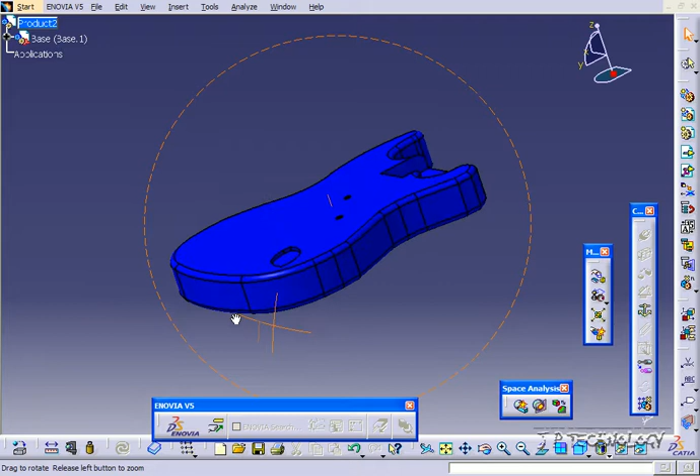So to start off, let's bring in a few parts. Click Insert, click Existing Component, click Product 2, and let's insert the base. Click Open, and we've brought the base in. Now we're going to be using this as our base, so we're always going to be selecting the other part first and this part second.

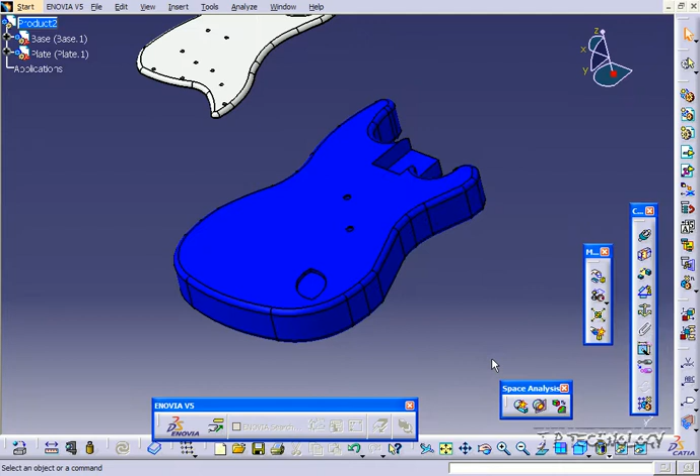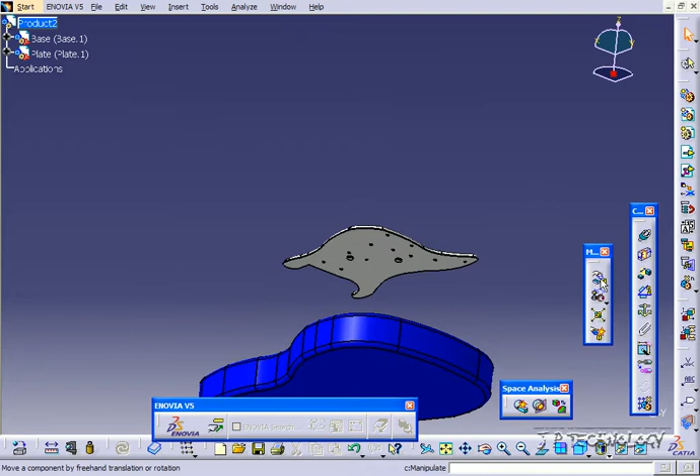Now let's bring in the plate, so click Insert, click Existing Component with Positioning, click Product 2, click the plate, click Open, and just move it around a bit. Click OK. We're going to line up one of these circles and position it over here. Let's click the snap feature and snap this axis to this axis here, and it's the right positioning, right way. We'll do the snap again and position it on this face. So now we've snapped the plate onto the base.

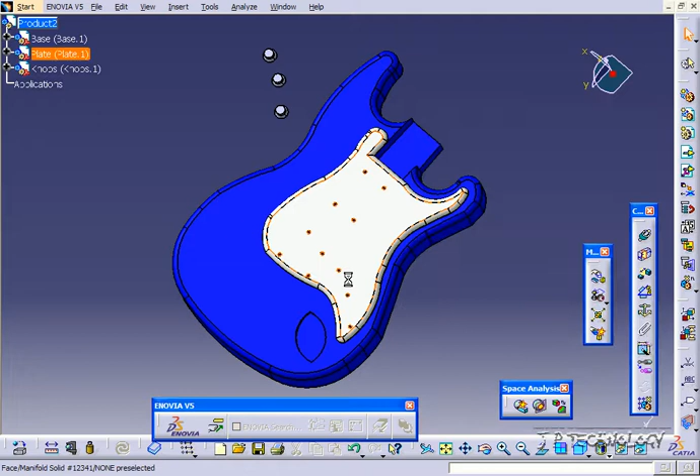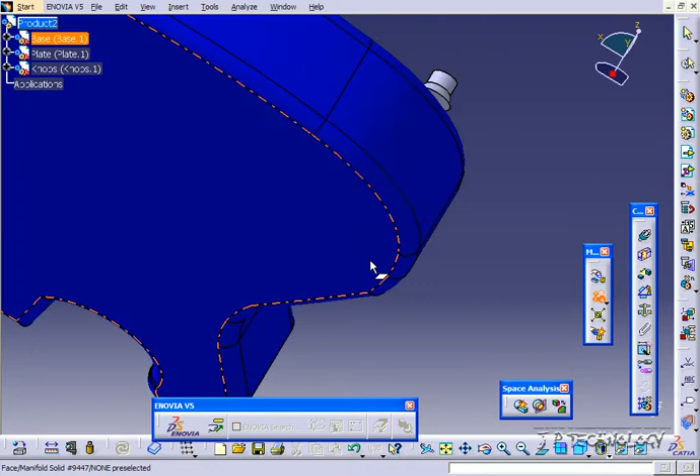Let's bring in a couple more components, click Insert, Existing Component with Positioning, Product 2, and this time let's click the knobs. Bring them in and just move them around so you can see where they are. Click OK, and let's position the knobs on these three holes here. Like the other ones, these knobs are already created as one part, so all I need to do is line up one of them, and they're all going to be lined up correctly. Now we'll snap the faces, this face here onto this face here, and now we've positioned our knobs.

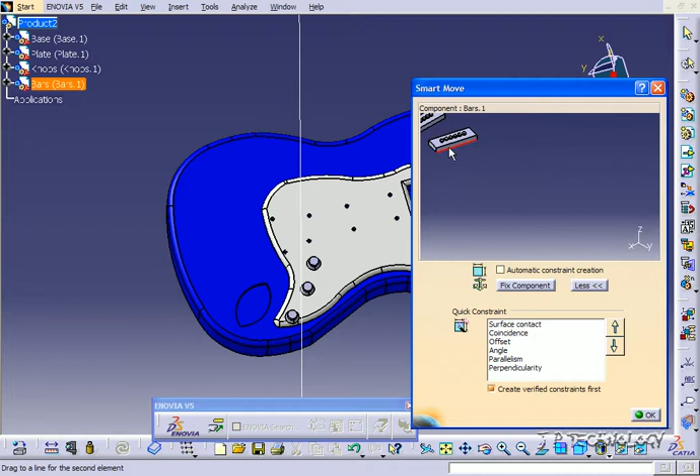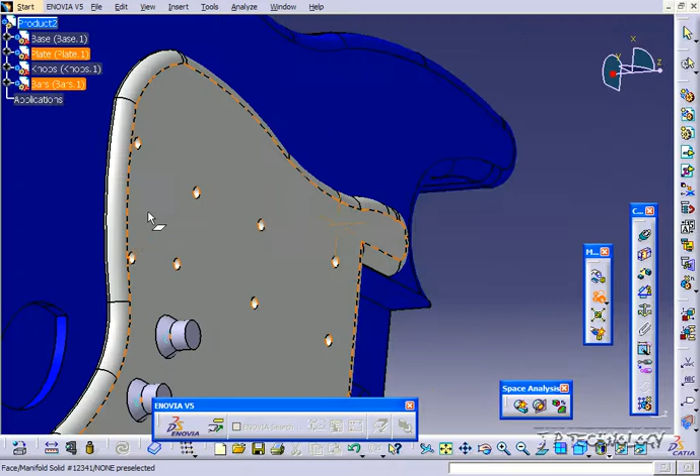Now let's bring in some more parts. Click Insert, Existing Component with Positioning, click Product, and we'll bring in the bars. Click Open, and just move them around so you can see them. Click OK. Now we'll click the manipulation, so snap these bars. I'm going to click this one there. Or wait, let me go back, we didn't select the axis. So select the axis there, and we'll select the axis here. Click OK, click outside, and now let's snap the faces together. Click this face, and click this face, and now we've snapped the bars on.

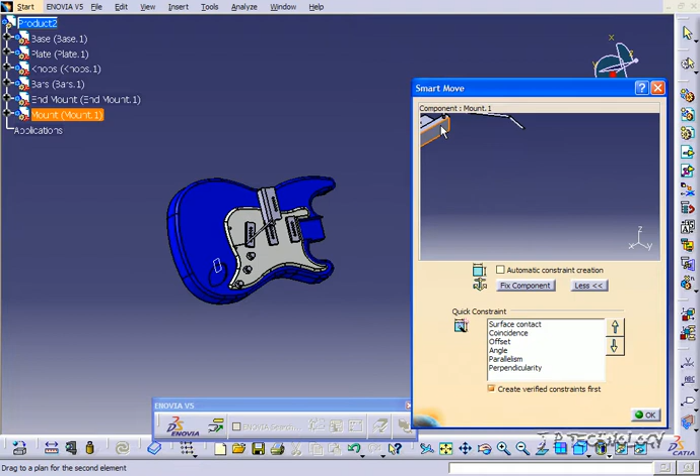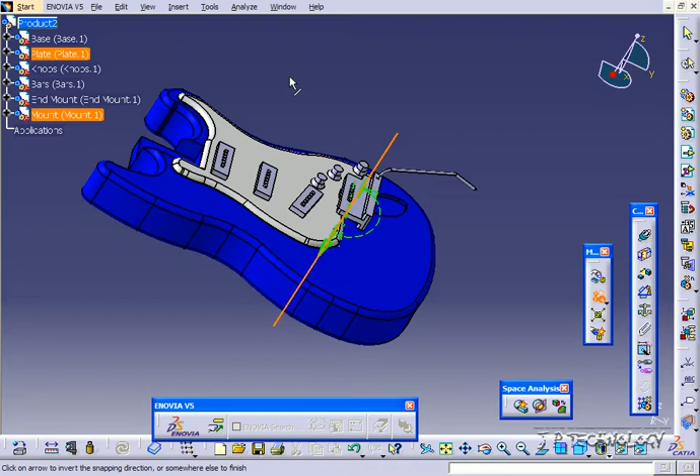So now let's insert another part. Click Insert, Existing Component with Positioning, click Product, and let's click the end mount, click Open, click OK. We don't actually need that one right now, we need the other mount. So click Insert, Existing Component, click Product 2, click the mount, click Open, and just move this around. Now with the end mount, just leave it there for now, and we'll position everything after. Click the snap, and let's choose the axis here, and we'll choose this axis here. Click outside, and now snap the faces. Click that face there, and that face there, and now we've snapped that down.

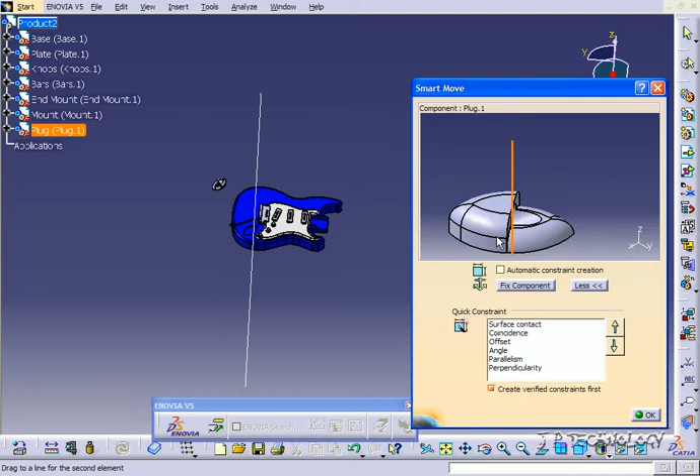So now we'll insert another component there. Click Insert, click Existing Component, click Product 2, and in this one, let's insert the plug. Click Open, and just move it around so you can see where it is. Click OK, and let's snap this. We'll click Snap, and click this face here, and click this face here, and now they're in line.

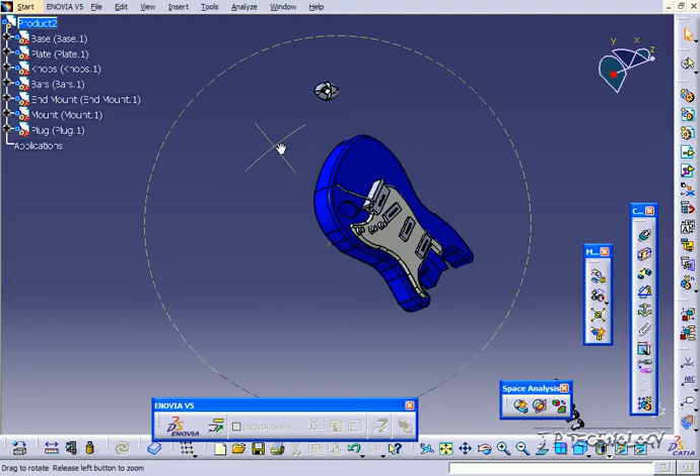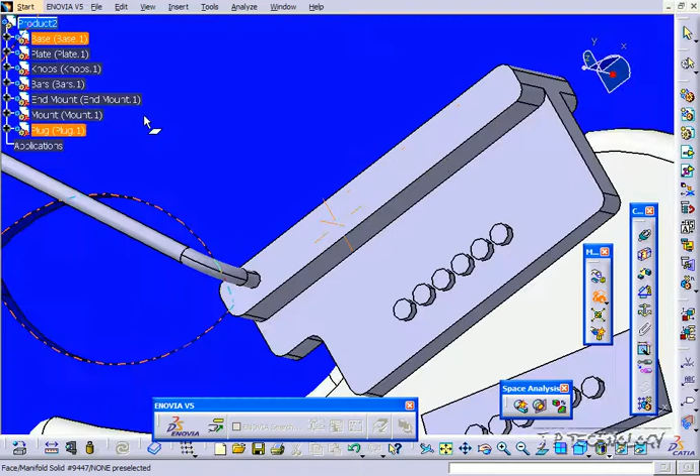So now we're going to snap a point. Click the snap, and we're going to choose that point right there, and we're going to snap it into here. Click that point there, click outside, and now we've snapped that component in.

Now we're going to bring in the neck, so let's insert it. Click insert, click existing component with positioning, click product 2, and let's bring in the neck, click open, and just move it around a little bit, click OK.

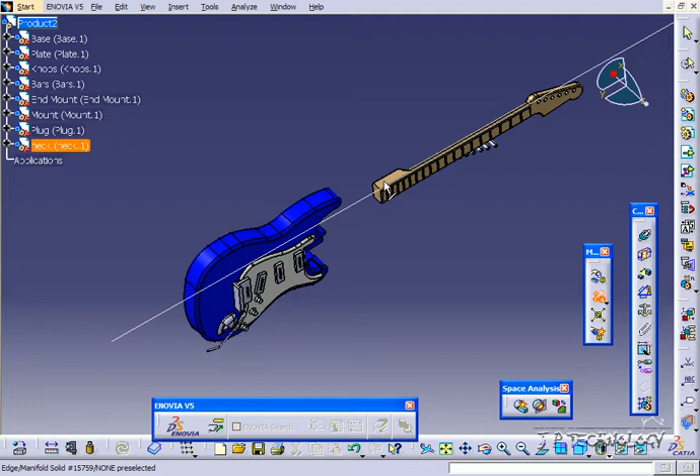Now click snap, click this face here, and click this face here. Click snap, and we'll snap this face here with this face here, and then snap this face here and this face here.

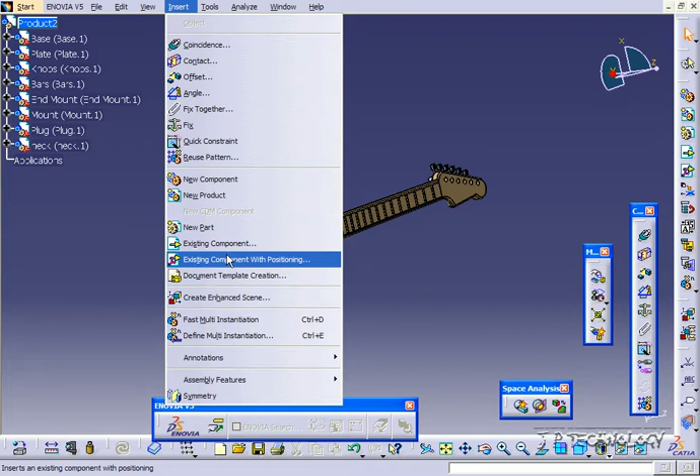Now let's bring in the strings. So click insert, click existing component with positioning, click product 2, click the strings, click open, and click OK. So now we have the strings and we have the end knobs that we have to position.

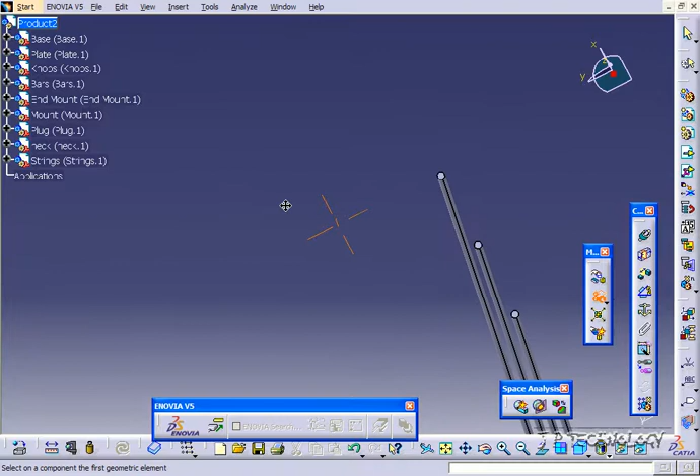So let's position the strings right now. Let's click snap, and we'll zoom in and just touch one of the faces of the strings, and we'll click this face here. You see that it's going in the wrong direction, so we're going to have to flip it, and now we have it going in the right direction.

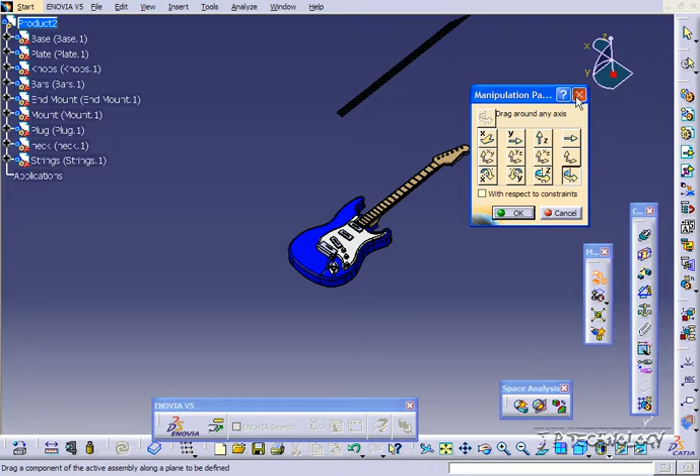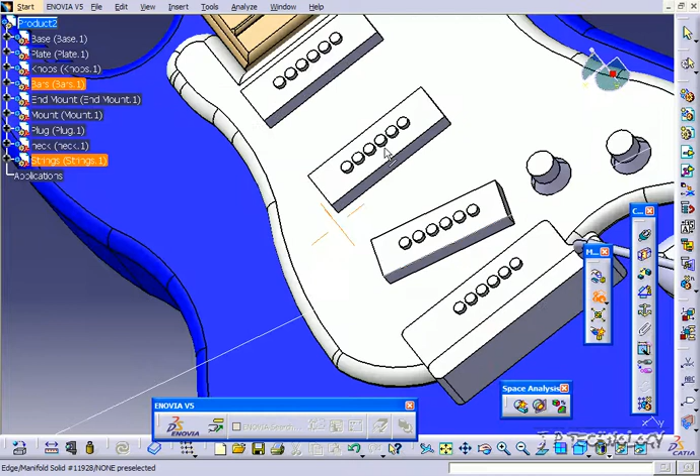And now we'll click snap again, and we'll choose one of the strings, and we'll click one of these circles here to snap it to. So now we have our strings in line there, and now all we have to do is just position it.

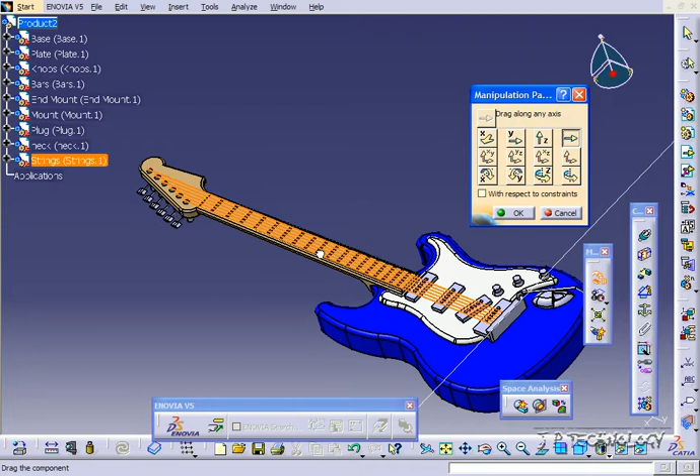So we're going to click the manipulation, and we're going to drag it along any axis. We're going to choose this axis here, pick it up, and we're just going to drag it. Now we're going to leave it where it is right now, just drag it wherever you think it should be, and then we're going to bring these guys up and position it. Click OK.

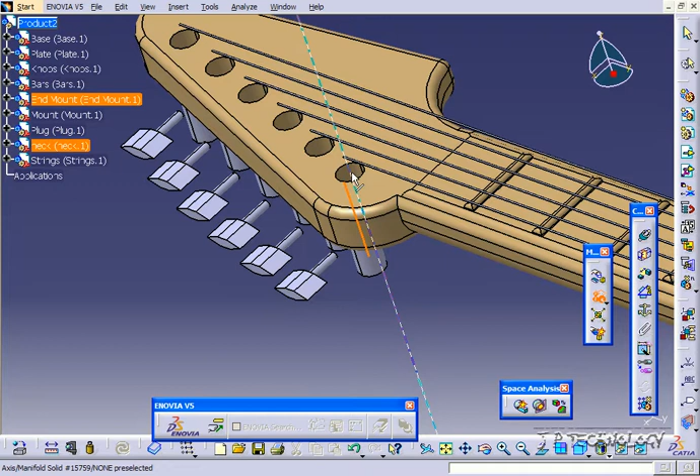And now let's snap these guys in. So click snap, click this axis, and then we'll click this axis here, snap it, and we have it in the right direction. Now we'll click snap, and we'll click this face here and this face there, and we have it going in the right direction. Click OK.

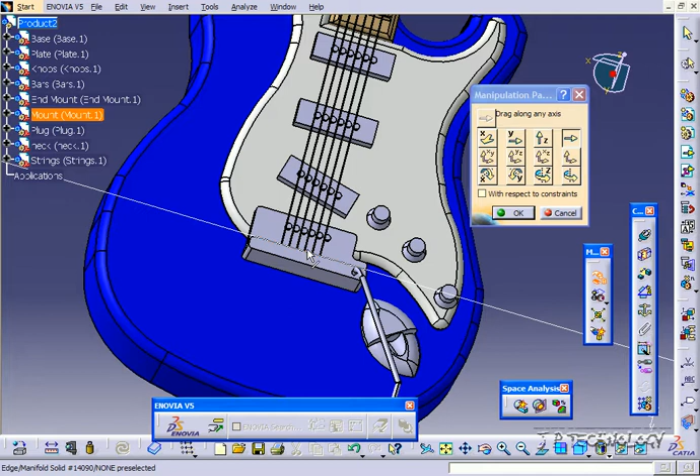And now if we look at our strings, they're a little bit too far to the left, so what we're going to do is click the manipulation. Now we're able to use the X axis if we wanted to, but in this case I'd rather just use one of the components that we threw in here and just use one of the lines as an axis. So click that line, and then we'll go up here and we'll just drag the strings over to the position that looks correct and lines up to, and click OK.

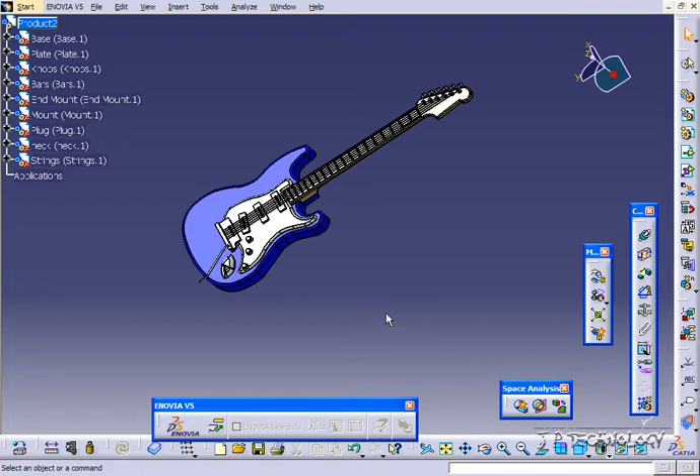So now we've created the guitar assembly using only positional assembly features. We don't have any constraints on the side. It was much quicker than using the constraint assembly features, and we still get pretty much the same degree of accuracy. So this was just two different ways to look at assembling the guitar.

Going through the process, you're going to learn how to bring all these components together, how you want to piece them together, and this was just two different ways at looking at one problem. And with CAD systems, that's how it always is. One problem has an infinite number of answers, so this is just two different ways to look at it and two different ways to set it up.

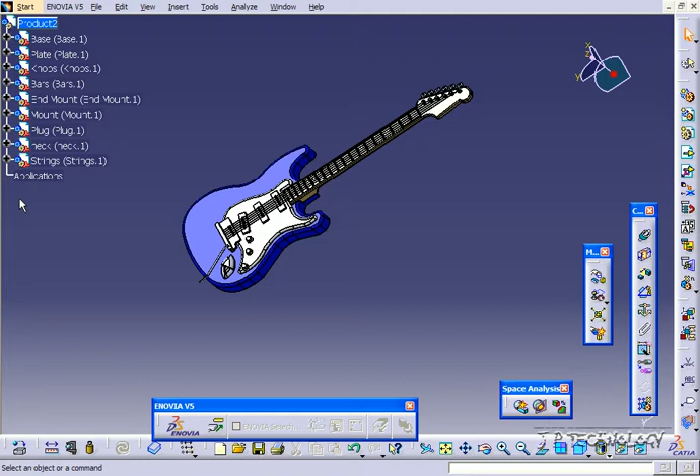But for the most part, this was an example of constraining an assembly and positioning an assembly, and these are the two results we get. And that concludes our tutorial on the guitar positional assembly within CATIA V5.